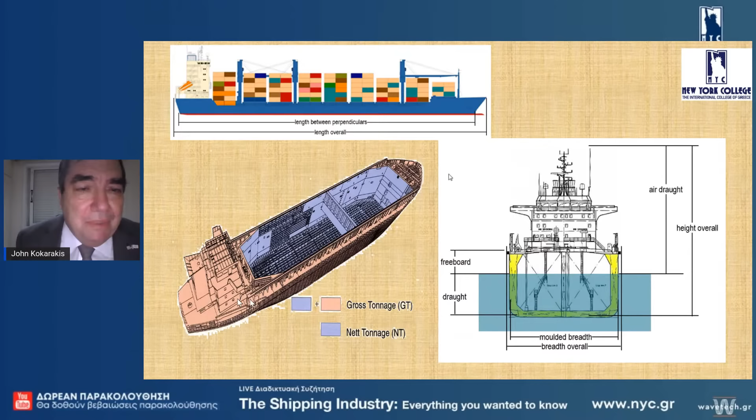So we go through the basics: draft, air draft, length. There are different definitions - if you say the length of the ship is so much, you practically say nothing, because there are 6 different definitions for length. But you have to know the 2 basic ones. As you see in the picture, the length between perpendiculars and the overall length - those are the critical ones.

Furthermore, we talk about the lines of the ships, we talk about stability, what are the basic modes of stability, how we load the vessel.

You probably have seen, those of you from shipping schools like captains or engineers, this so-called Plimsoll mark that indicates up to which point you can load the vessel. And of course there are different marks depending on where you are in the world, like tropical, summer and winter, because the density of the seawater changes, and of course the buoyancy, so the sinking of the ship changes depending on the density.

Always we have equilibrium - the buoyancy acting on the vessel equals the weight. We cannot exceed the allowable full draft of the vessel.

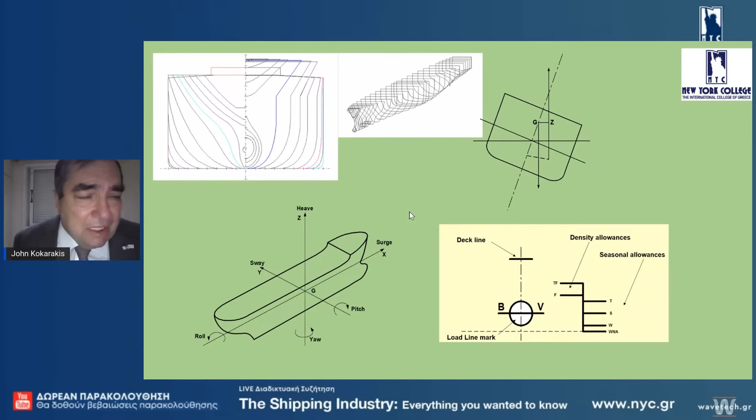Very important is the response of the ship to waves. So we have different movements. We touch this not in great detail because, of course, remember - naval architecture for non-naval architects.

Then we go through the ship structures, how the ships are made, what are the basic components that put together make the whole construction of the hull. When we say hull, we mean the ship. The blocks - here you see one of the blocks - many blocks together make the whole ship.

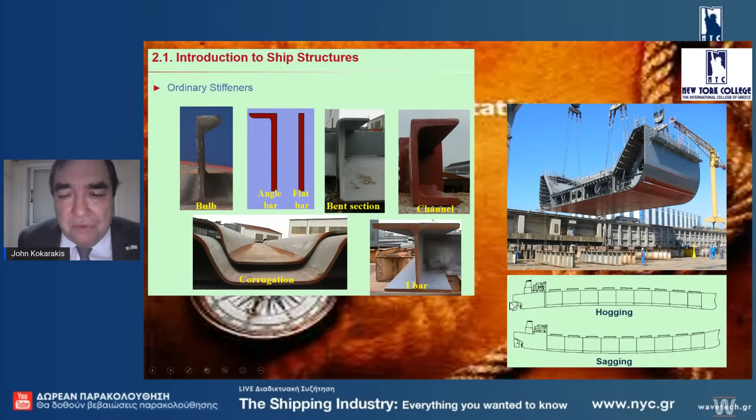We see corrugation. Why corrugation? We explain in the course. The ships are not rigid; they deform under the action of waves. So we have the so-called hogging and sagging, depending on the load on the vessel.

Then we have the surveys. What are the surveys? What types? We have classification surveys - I work in a classification society, the French Classification Society. We have statutory surveys, which are performed by the class on behalf of the flag of the vessel. And we have various other types.

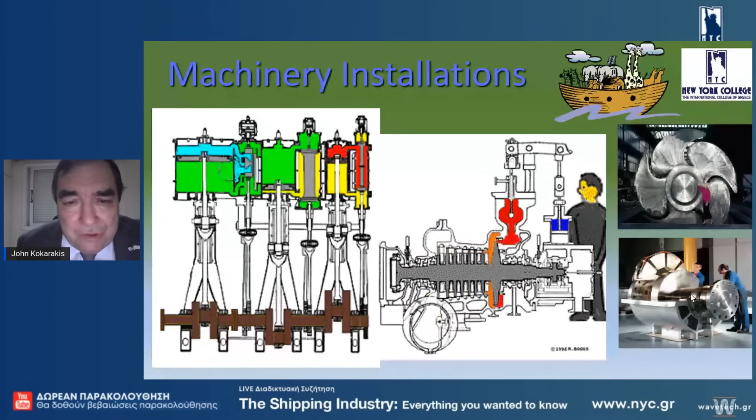About propellers and what takes the forward force on the propeller, it is on the vessel, the so-called thrust bearing. You have to know this terminology, and at least we touch on it. Some of these problems, you'll probably work in a shipping company in the future, so you have to know what you will be faced with.

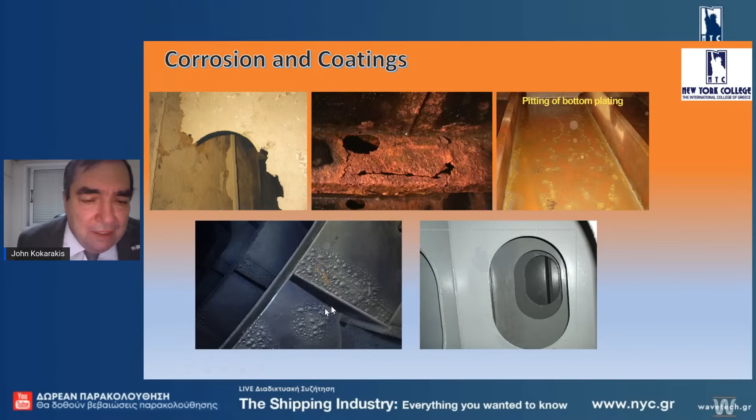Here you see an example of blisters. This is not a good application of coatings. There was dirt on the steel part that created this blistering.

It is very important, and those of you who are professional mariners know this is a requirement: the so-called STCW, Standards for Training, Certification, and Watchkeeping. It describes the qualifications of captains and engineers, first, second, third engineer, and also captain grades. These are important, and the STCW is a statutory requirement set by the International Maritime Organization. The IMO is the one that has published the relevant guidelines and regulations.

An important part of the job is dry docking. Prior to dry docking, you have to describe what you need from the shipyard, what services you will require. You send it to a few shipyards to get a financial proposal from them, and then some of you will have to be there physically to supervise the job and make sure it is done properly. So one good product of this class will be learning how to write dry docking specifications.

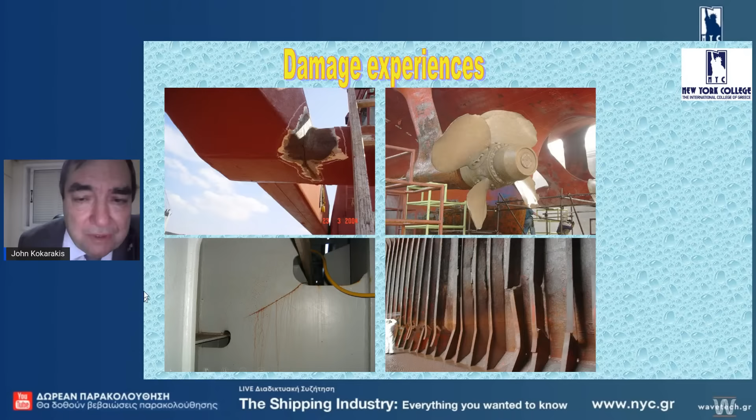A very important part, but an unfortunate, inevitable occurrence, is damage. Ships are grounded, the propeller touches the ground. You see what happens in a bulk carrier - those are the so-called frames. When one frame breaks, the adjacent one takes the load, so usually it becomes deformed.

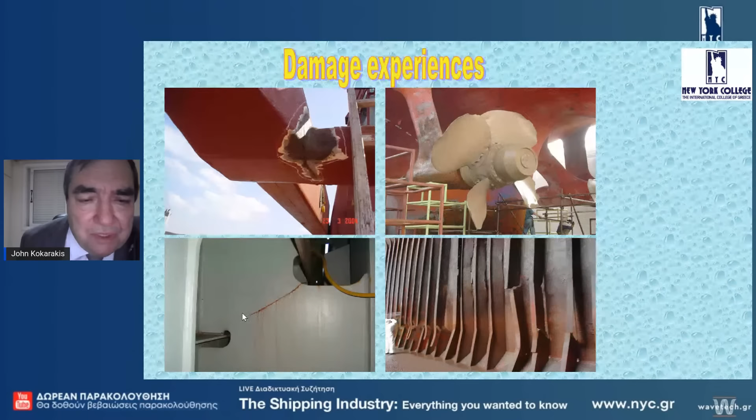There is a problem. Here you see one of my favorite topics, a crack. We will talk about cracking, just the basics. If the crack reaches a certain length, which we call critical, it's going to propagate in the steel at the speed of sound in steel, about 4 kilometers a second. There is not much the crew can do - the ship will be cut in two, and this is something you don't want to occur.

We will talk about fuels, conventional fuels. Depending on the interest of the class, we can go into more exotic fuels like ammonia, methanol, hydrogen, LNG, depending on what interest there is. But we talk about the properties, the handling and the treatment.

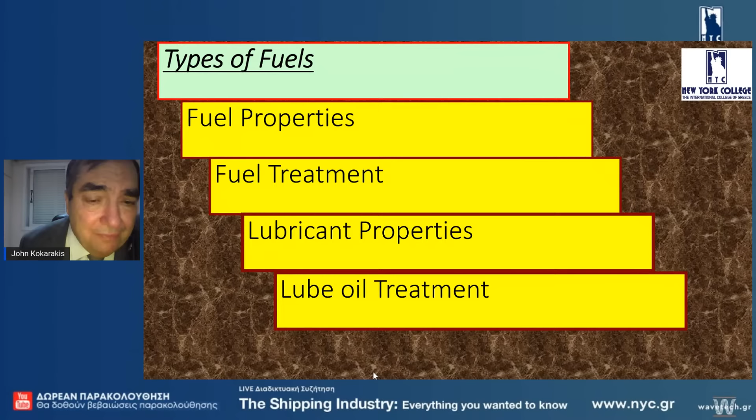You can't just take the fuel from the fuel barge and burn it. You have to clean it, filter it through separators. And also we talk about lubrication, the lubricant properties, and the lube oil treatment. It's important for the bearings to be protected by an oil film which assists them to withstand the load.

A very important part of our job is to make sure that when we order a new building, we include all the loopholes that may happen, because the shipyards are not working for you, they're working for themselves. So it is important to know what to check - we will go through it and point out what to look for.

There is a very limited guarantee after you get the vessel, only one year. I will show you the bathtub curve where in the first year many damages occur, but not all of them. You have to achieve a certain speed, a certain draft, a certain dead weight, a certain fuel consumption. If those are exceeded, the shipyard has to pay penalties, and this has to be specifically spelled out in the new building contract. So when you review a new building contract, you have to make sure that it is there.

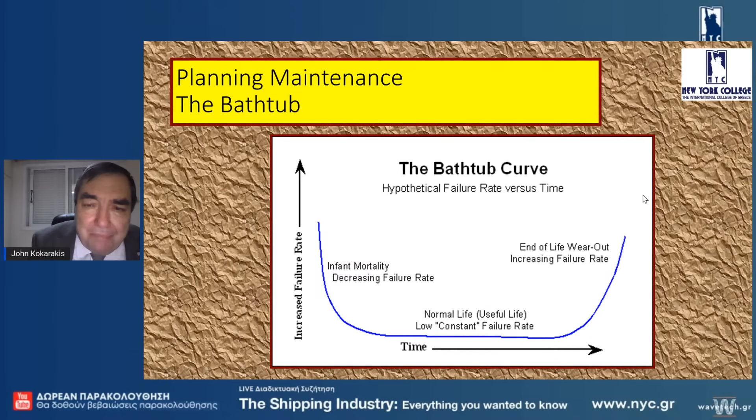We mentioned the bathtub curve, which you see here. In the beginning, assume you bought a car - in the first kilometers you have a lot of damages, which are reduced with time. We reach a point where they remain constant, and then towards the end of life of the machinery, the car, the engine, the number of damages or problems starts increasing as well. We call this the bathtub curve because it looks like a bathtub.

Important is to see how to buy spare parts, not the monkey parts. Avoid them as much as you can, as much as you are allowed, because they do not comply with the specs, and sooner or later they will fail. If you cannot do differently, make sure you pick the right ones.

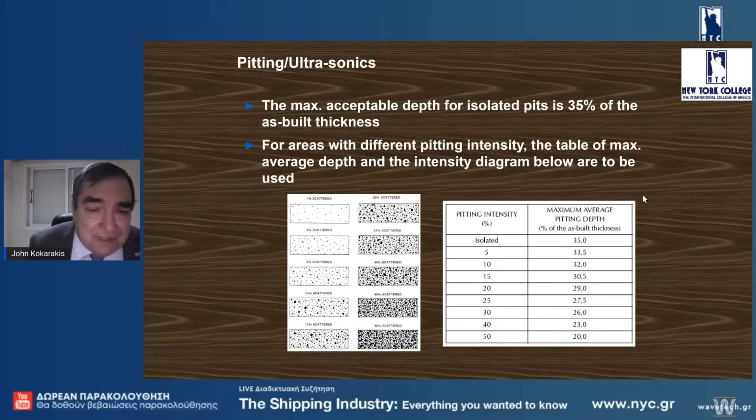Also, when we check a vessel, there are a lot of times there is pitting, especially in the bottom, because as you can imagine, all the junk, all the bad things will go in the bottom. So we have various degrees of pitting - these holes in the bottom are called pits. Pit in Greek is pigadi. So we see these holes, and depending on the pitting intensity, we accept or don't accept this. If there is heavy pitting, the owner, the vessel has to change that plate.

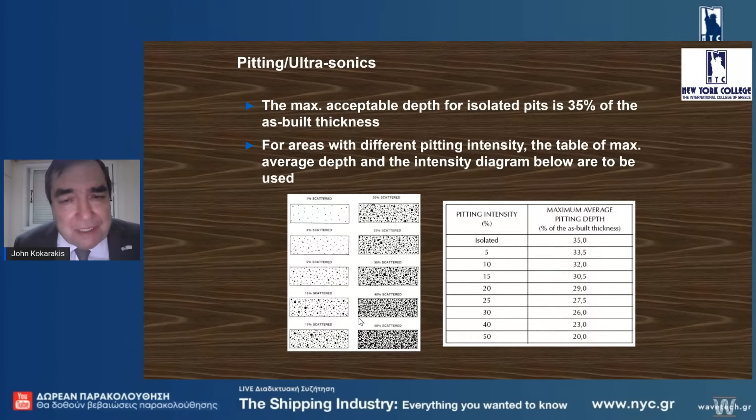The thickness of the plates changes with time because of corrosion. So during the special surveys of the vessel, typically when it is in the dry dock, we have the ultrasonic guys that go there, and they measure with ultrasonics the thickness, and they compare with the initial one, and there are limits on what percentage is acceptable to be reduced.

2020, those of you that were active, you know we have a dilemma of the low sulfur fuel, or using or putting scrubbers, or alternative fuels like LNG.

I hope that I gave you a good idea of what the class will be. I hope to see all of you in the class, and will accommodate you. I would like to point out that a lot of the stuff that we cover in the class is very practical, not theoretical. After 5 years in the Polytechnio, a lot of this stuff I had not heard, so I hope you will have the opportunity to hear them. Thank you very much for your attention, and I will be very happy to reply to your questions.